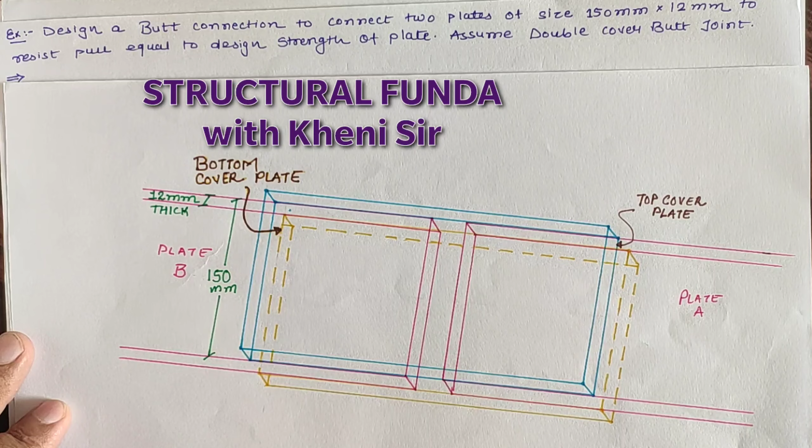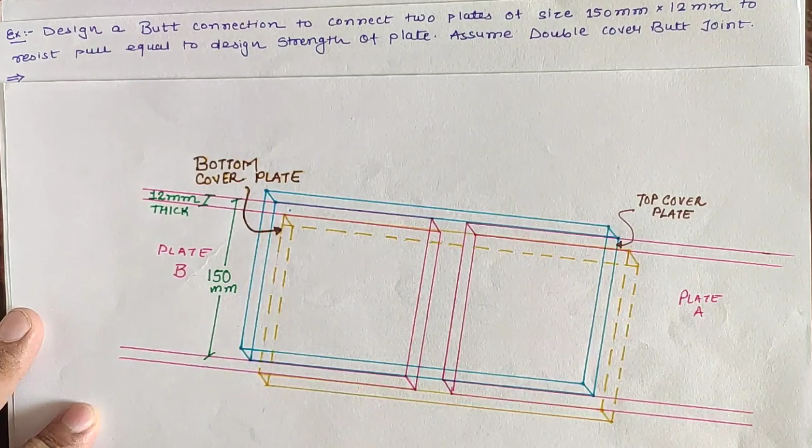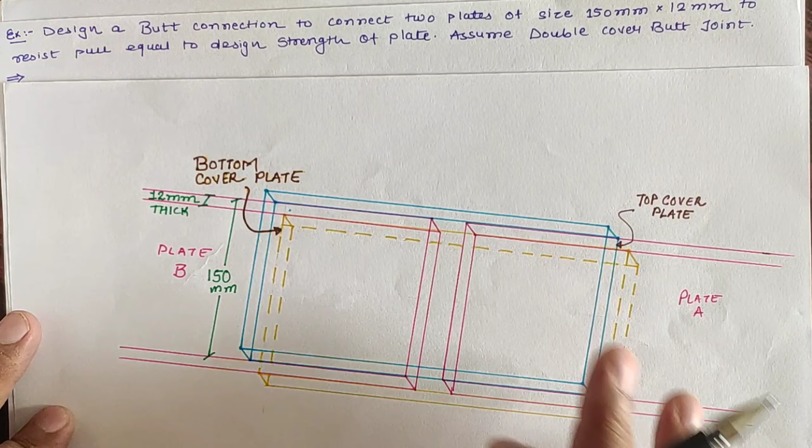We have to connect two plates of size 150 mm width and 12 mm thick as connecting plates, and design the connection for pull strength equal to design strength of plate. So we use the total strength of the plate as design load. We are given a double cover butt joint. The figure shows plate A as pink and plate B connected via butt connection. For the butt connection we require two extra plates as a double cover butt joint, indicated as yellow and blue color as top cover plate and bottom cover plate. So we have to design the welded connection for these given data.

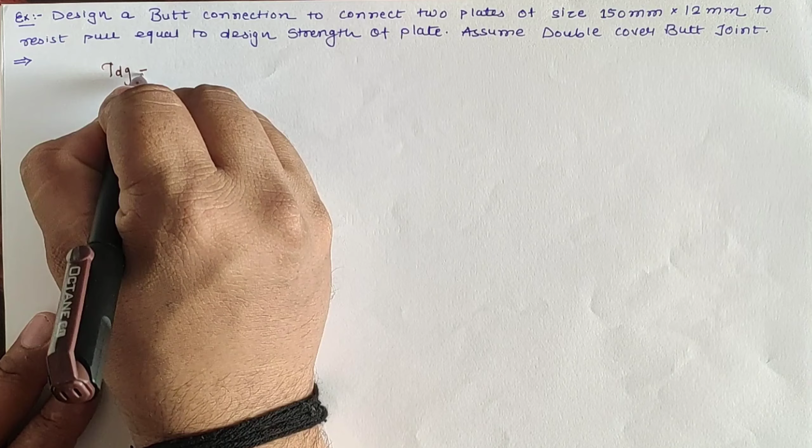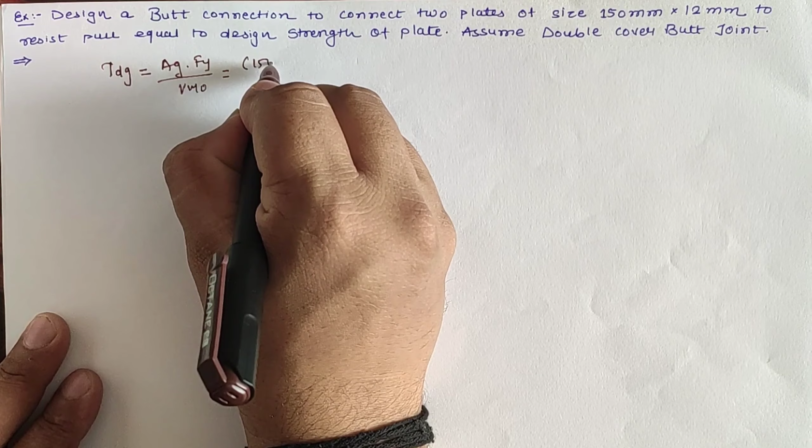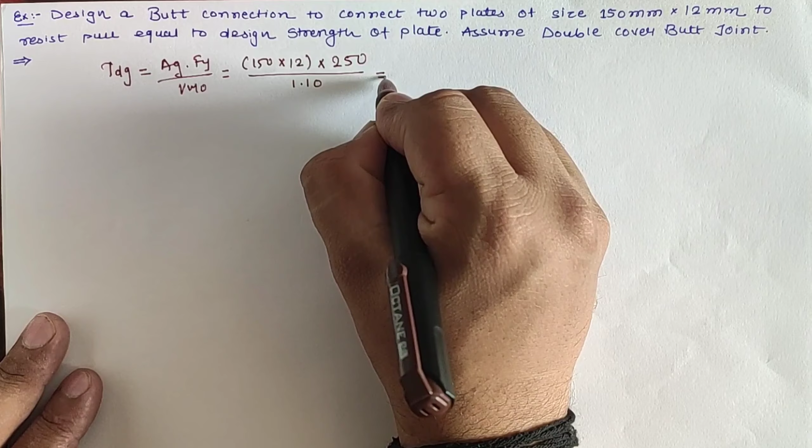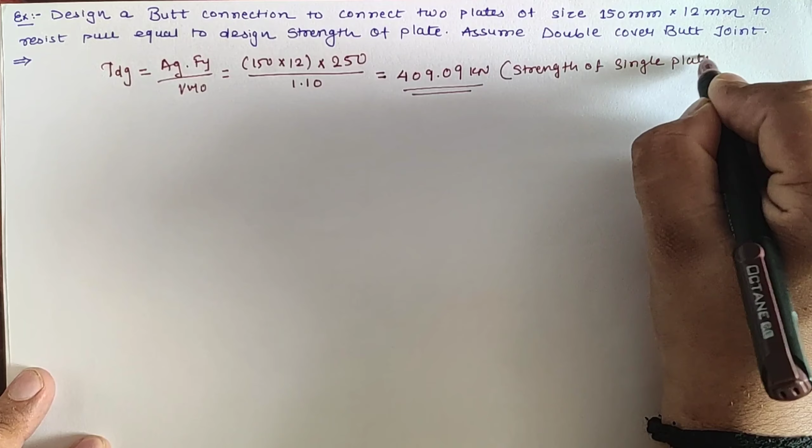Let us go for the solution. First of all we have given the size of plate. From the size we can calculate the total strength of a single plate as Ag Fy by gamma m0. Gross area of single plate is 150 cross 12 mm as size of plate, Fy is 250 Newton per mm square, and gamma m0 is 1.10, which is equal to 409.09 kilonewton. This value is the strength of a single plate, either A or B plate.

So we are going to calculate the length of weld required for plate A or plate B, and according to the calculation we are going to provide the length of weld on both the plates.

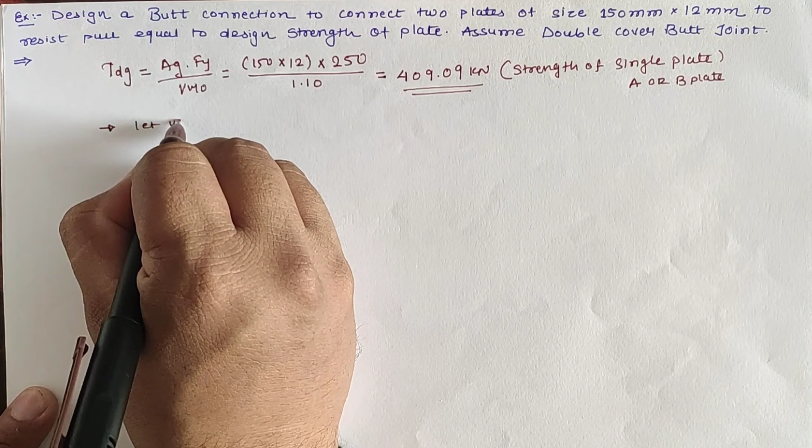Now for the size of weld, let us assume size of weld for this connection as 6 mm. Hence throat thickness is K into size of weld, which is equal to 0.7 into 6 as 4.2 mm.

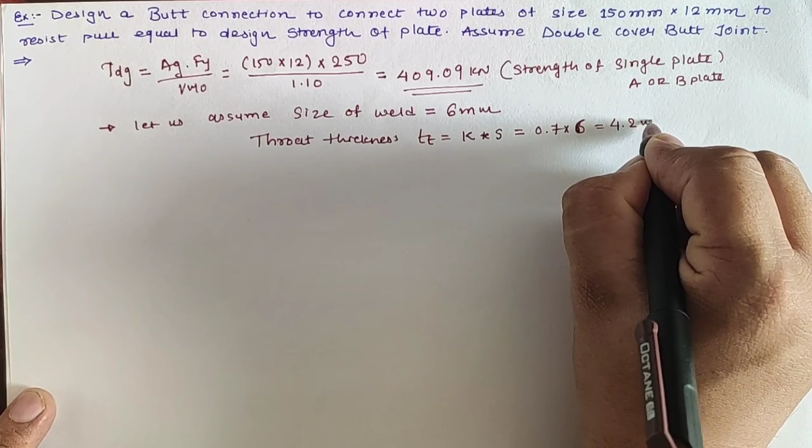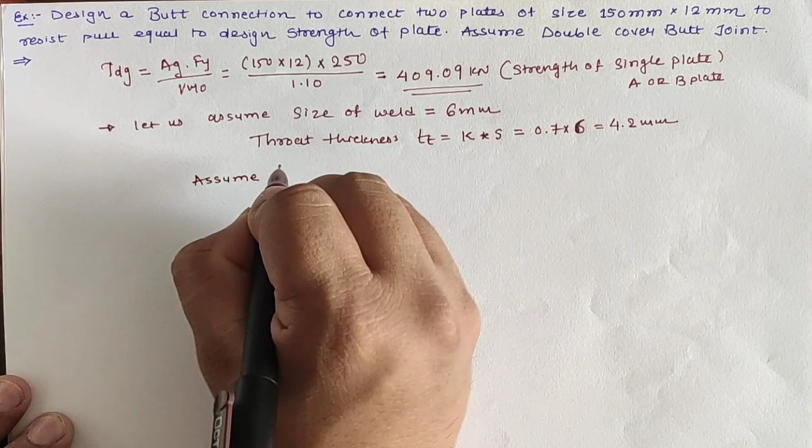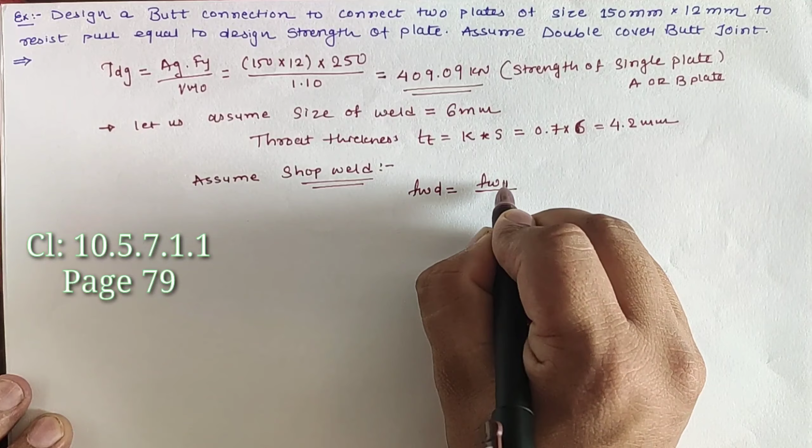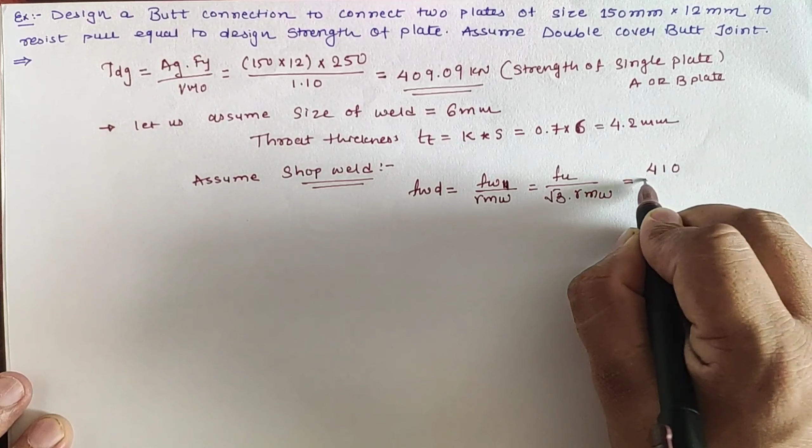Now we do not have the given data as field weld or shop weld, so let us assume shop weld for the butt connection. Hence for shop welding, the design strength can be calculated by Fwn by gamma mw. Fwn is Fu by root 3 into gamma mw. Fu is 410, root 3 is constant, and gamma mw is 1.25 for shop weld. So the design strength is 189 Newton per mm square.

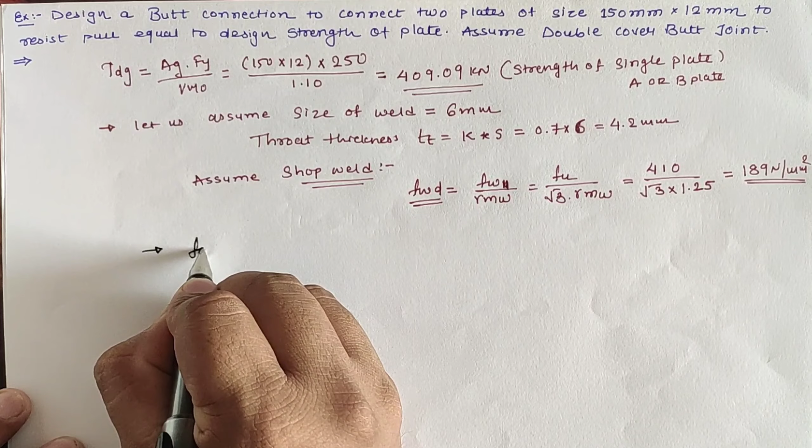Going ahead for calculation of length of weld required, our equation is Fa or Q equals design load divided by length of weld into throat thickness. Hence length of weld required equals design load divided by design strength into throat thickness. Design load is 409.09 into 10 raised to 3 Newton, Fwd is 189 Newton per mm square, and throat thickness is 4.2 mm. So total length of weld required is 515.36 mm, and it is per plate.

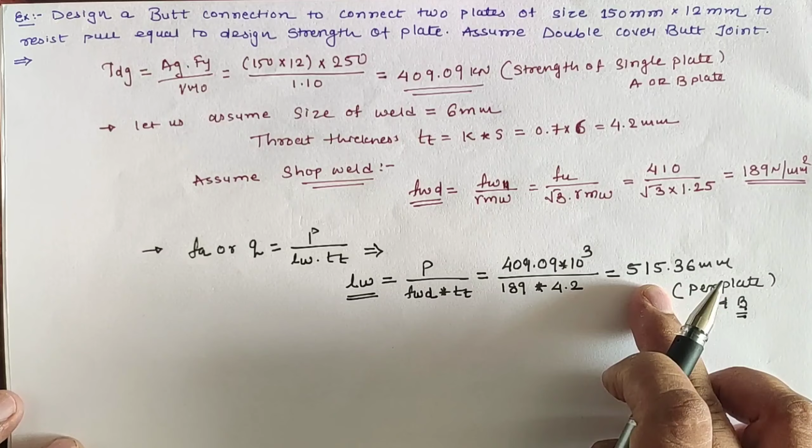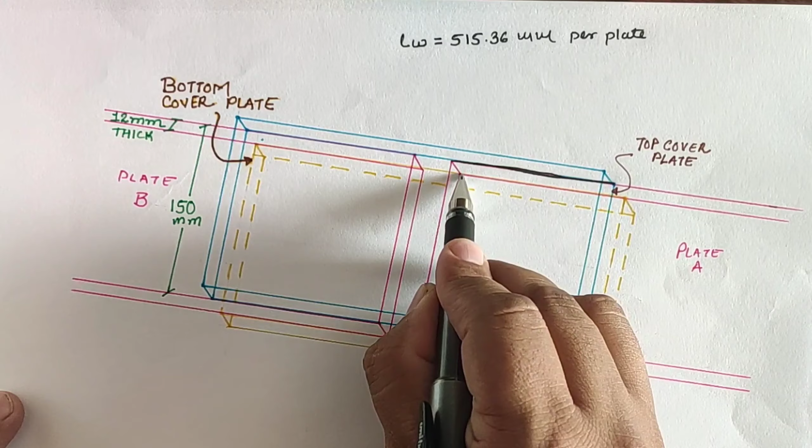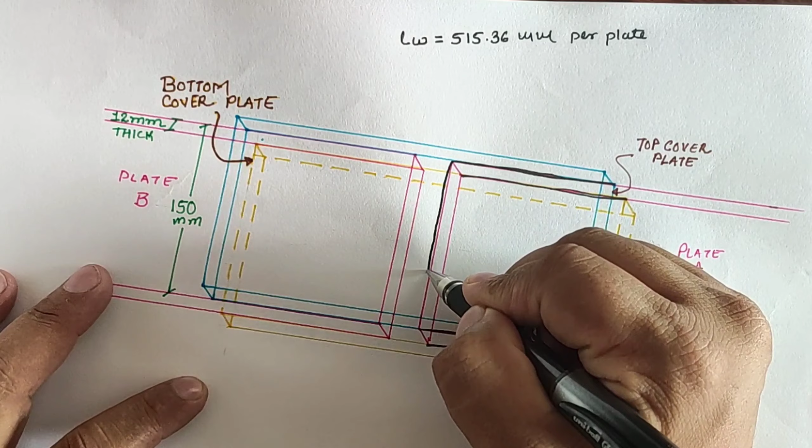It means for plate A and plate B. Let us go for the detailing work. Total length of weld provided is 515.36 mm per plate. Observing the figure for plate A, which is connected by two cover plates at top edge and bottom edge, we require total faces: one at the junction of top plate, one at the junction of bottom plate at top side of plate A. Similarly at bottom side of plate A, one at top cover plate and one at bottom cover plate. As well as we have to provide length of weld at edges of the plate as edge 1 and edge 2.

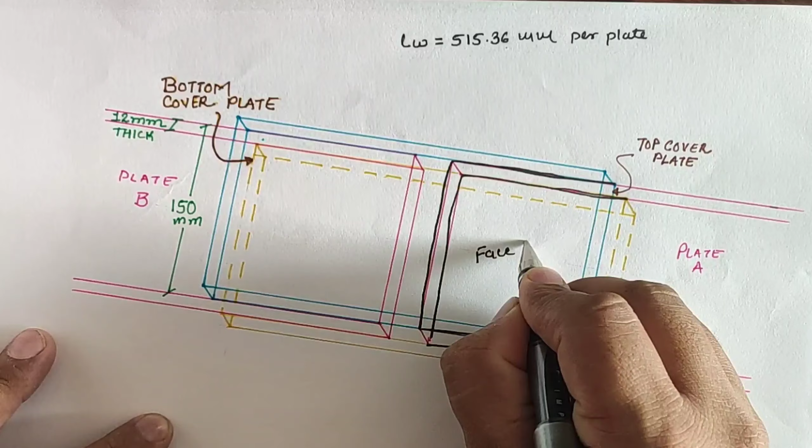So 515.36 mm is provided at total 6 edges as shown in the figure. If we say the top cover plate is face 1 and bottom cover plate is face 2, then at both faces total 3 edges are required to connect the welded connection.

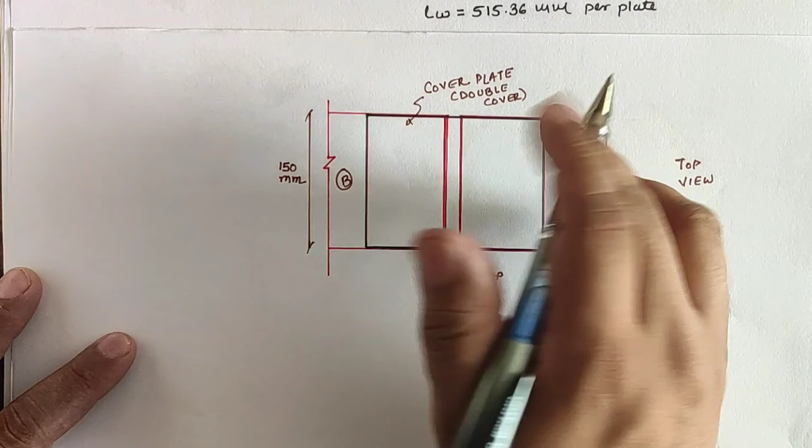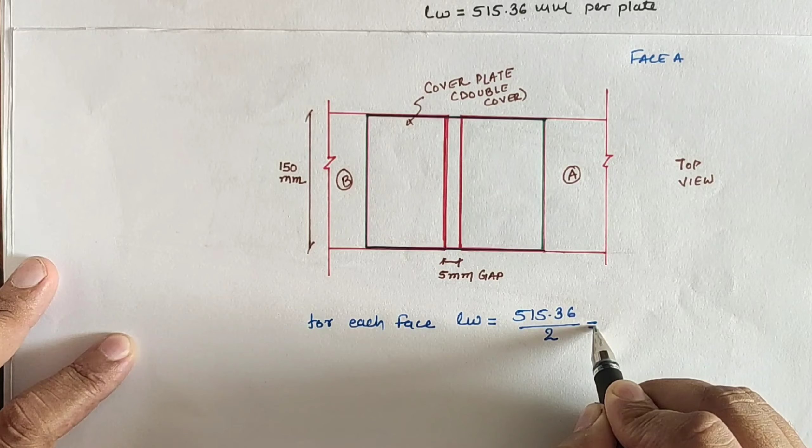Let us go for the calculation of this length of weld required. The figure indicates the top view of face A of the double cover butt joint. Total required length is 515.36 mm per plate, and this length is for face A as well as face B. So for each face, total length of weld required is 515.36 divided by 2. Hence the required length is 257.68 mm on each face.

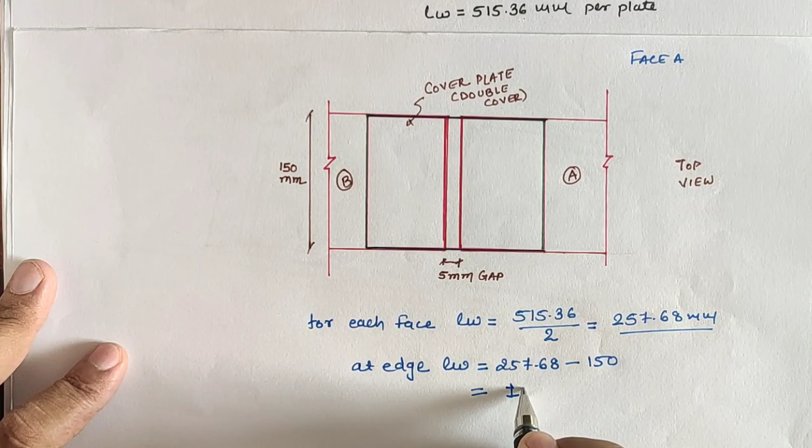Out of 257.68 mm, we know the vertical depth, or the width of the plate, is 150 mm. So at edges, length of weld is 257.68 minus 150. So remaining length of weld is 107.68 mm, and this value is distributed on top and bottom.

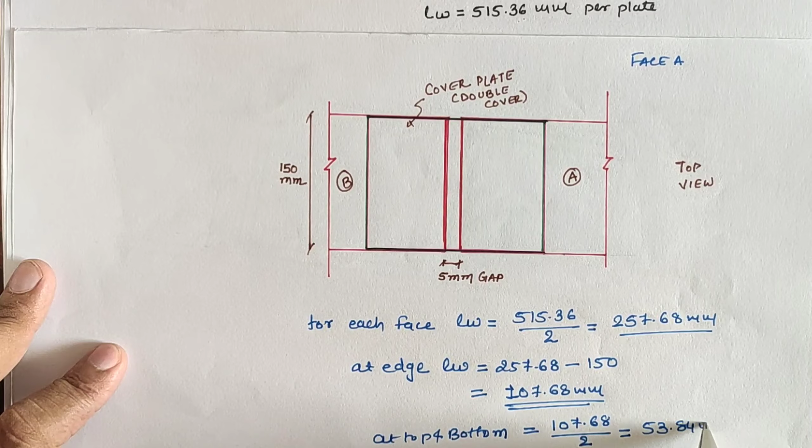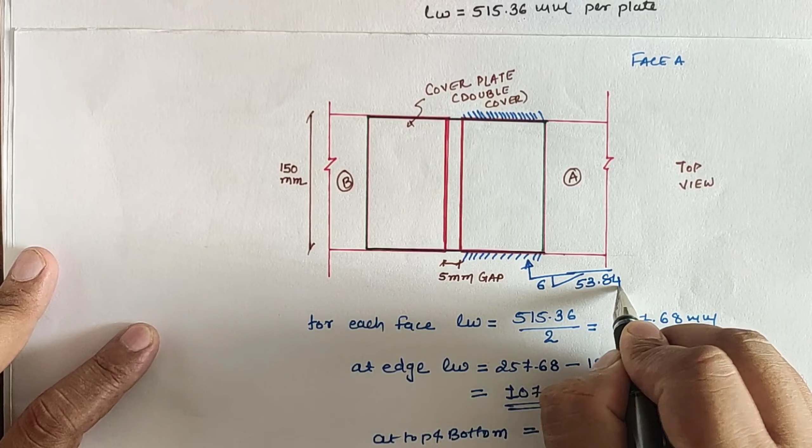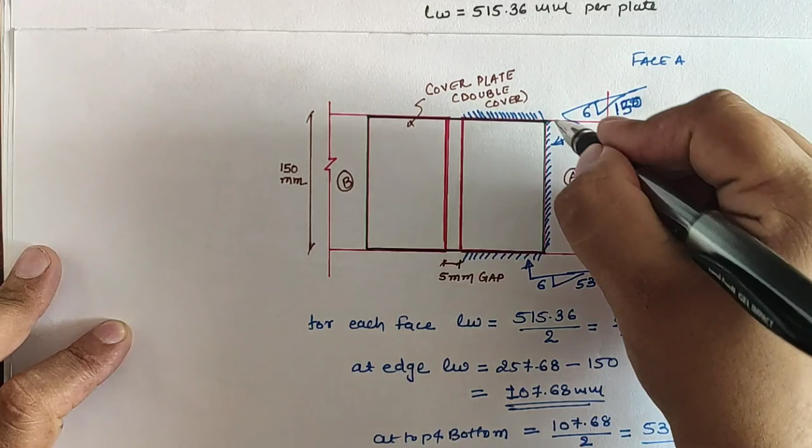At top and bottom, remaining length is 107.68 divided by 2, which equals 53.84 mm. The length of weld at top and bottom on face A is 53.84 mm, while the length of weld at sides, or the edges of the plate, is 150 mm. So total length of weld is 150 at edge plus 2 times 53.84 at top and bottom, and the total length is 257.68 mm on face A.

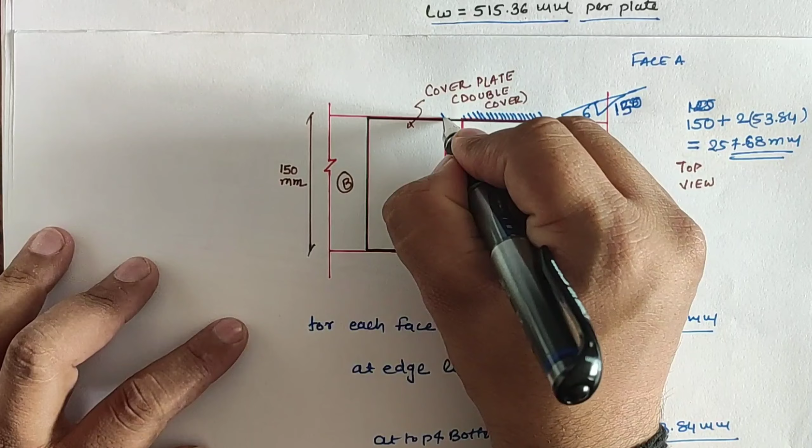Same length of weld is provided at both faces of plate B. The given figure shows the detailing of the double cover butt joint according to the required data. Thank you.